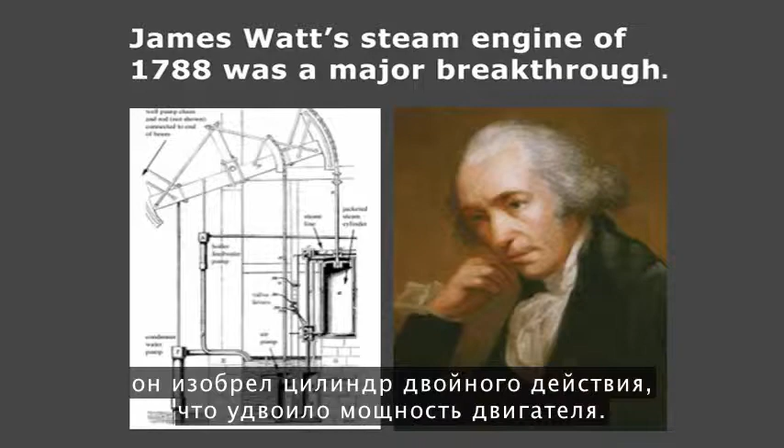And one of the great ones of all time, James Watt's steam engine of 1788 was a major, major breakthrough. James Watt didn't actually invent the steam engine, he just refined it, but his refinements were incredible. He added new linear motion guides to the pistons, he added a condenser to cool the steam outside the cylinder, he made the engine double acting so it had double the power. Those were major breakthroughs. I'm in awe of the improvements he made, and it's justifiable that our measure of power is the watt today that's named after him.

So we looked at this engine, and this had some potential. Steam engines are dangerous. They had tremendous impact on the world, as you know, Industrial Revolution and ships and locomotives, but they're usually good to be large, so they're not good for distributed power generation. They're also very high pressure, so they're dangerous.

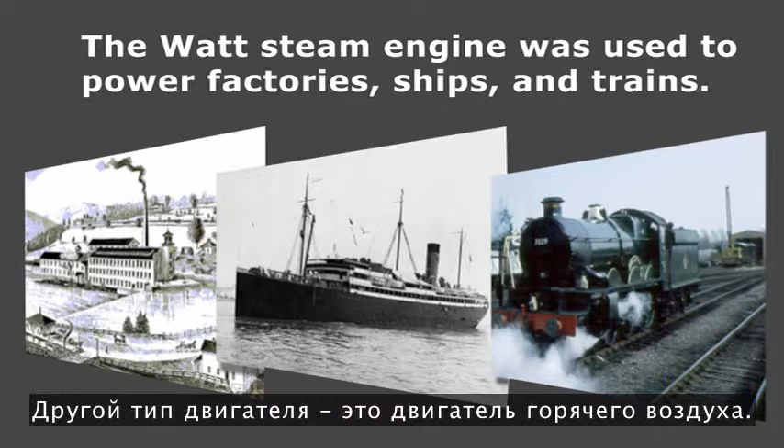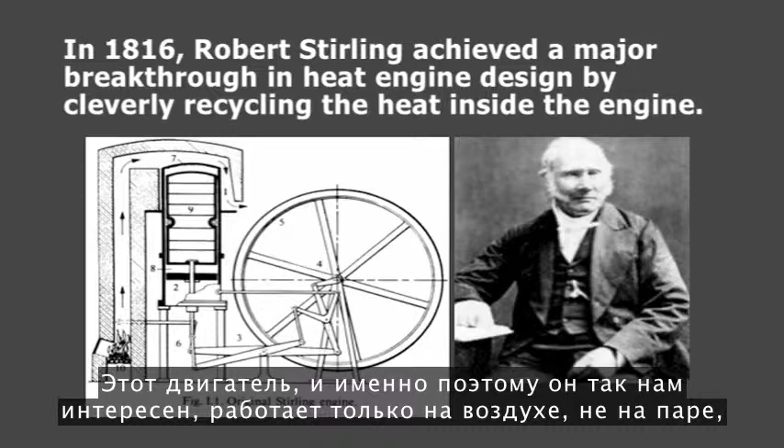Another type of engine is the hot air engine. And the hot air engine also was not invented by Robert Stirling, but Robert Stirling came along in 1816 and radically improved it. This engine, because it was so interesting, because it only worked on air, no steam, has led to hundreds of creative designs over the years that use the Stirling engine principle.

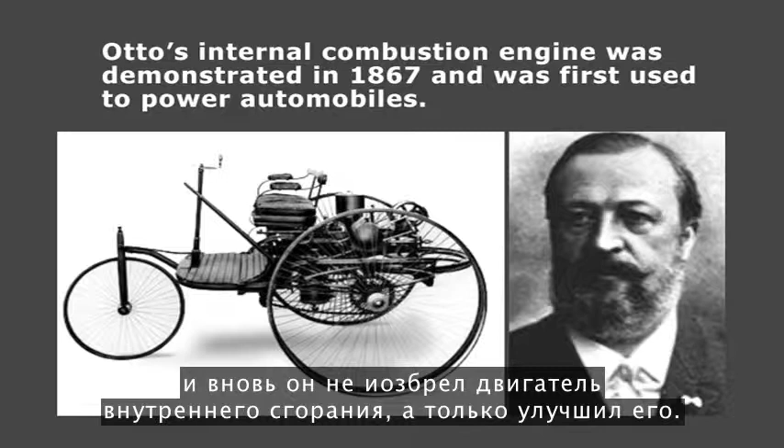But after the Stirling engine, Otto came along, and also he didn't invent the internal combustion engine, he just refined it. He showed it in Paris in 1867, and it was a major achievement because it brought the power density of the engine way up. You could now get a lot more power in a lot smaller space, and that allowed the engine to be used for mobile applications. So once you have mobility, now you're making a lot of engines because you've got lots of units as opposed to steamships or big factories where you're not making as many units.

So this was the engine that ended up benefiting from mass production, where all the other engines didn't benefit. So because it went into mass production, costs were reduced, 100 years of refinement, emissions were reduced, tremendous production volume. There have been hundreds of millions of internal combustion engines built compared to thousands of Stirling engines built, and not nearly as many small steam engines being built anymore, only large ones for big operations.

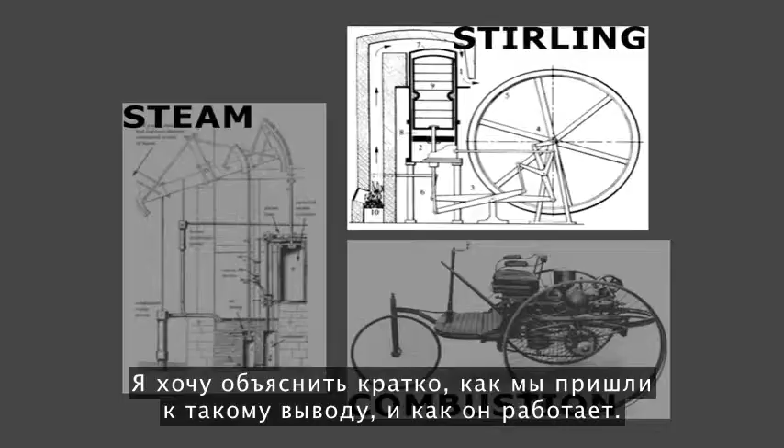So after looking at these 3 and 47 others, we concluded that the Stirling engine would be the best one to use. I want to give you a very brief explanation of how we looked at it and how it works. So we tried to look at the Stirling engine in a new way because it was practical. Weight no longer mattered for our application. The internal combustion engine took off because weight mattered because you were moving around. But if you're trying to generate solar energy in a static place, the weight doesn't matter so much.

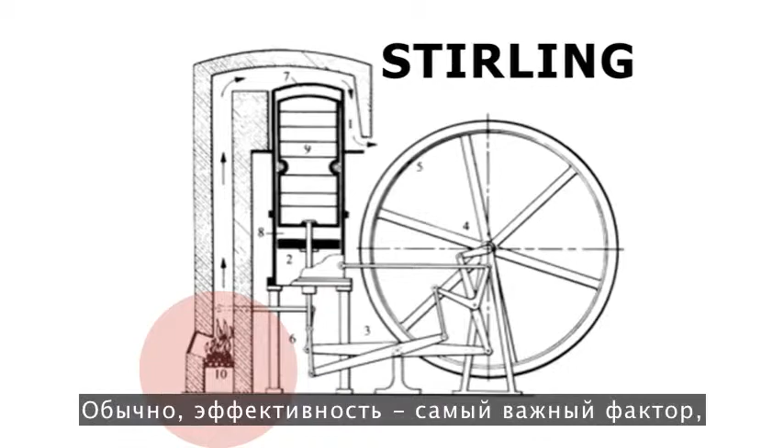The other thing we discovered was that efficiency doesn't matter so much if your energy source is free. Normally, efficiency is crucial because the fuel cost of your engine over its life dwarfs the cost of the engine. But if your fuel source is free, then the only thing that matters is the upfront capital cost of the engine. So you don't want to optimize for efficiency, you want to optimize for power per dollar. So using that new twist with the new criteria, we thought we could re-look at the Stirling engine and also bring genetic algorithms in.

Basically, Robert Stirling didn't have Gordon Moore before him to get us 3 gigahertz of processor power. So we took the same genetic algorithm that we used earlier to make that concentrator, which didn't work out for us, to optimize the Stirling engine and make its design sizes and all of its dimensions the exact optimum to get the most power per dollar, irrespective of weight, irrespective of size, just to get the most conversion of solar energy because the sun is free. And that's the process we took.

Let me show you how the engine works. The simplest heat engine or hot air engine of all time would just be this. Take a box, a steel canister, with a piston. Put a flame under it, the piston moves up. Take it off the flame and pour water on it or let it cool down, the piston moves down. That's a heat engine. That's basically the most fundamental heat engine you could possibly have.

The problem is the efficiency is 1/100th of 1% because you're heating all the metal of the chamber and then cooling all the metal of the chamber each time. And you're only getting power from the air that's heating at the same time, but you're wasting all the energy heating the metal and cooling the metal.

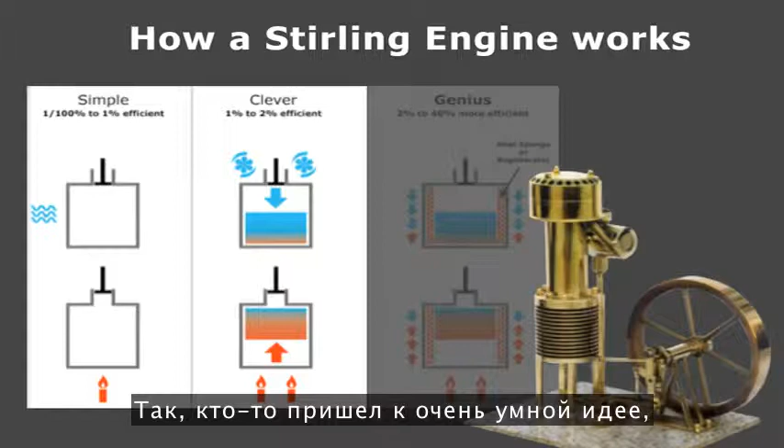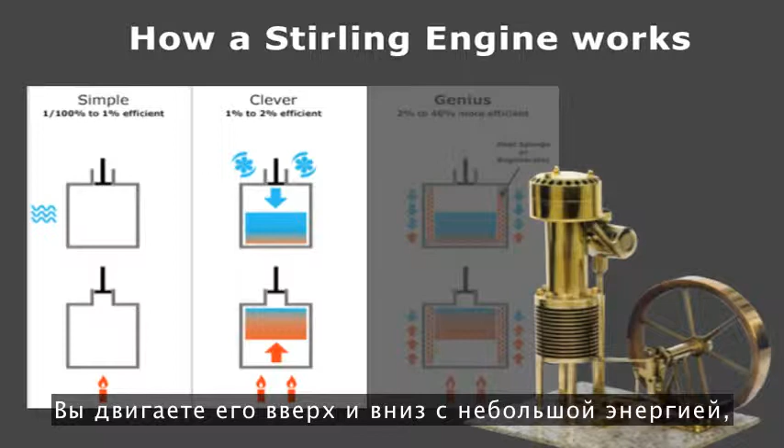So someone came up with a very clever idea to, instead of heating the whole cylinder and cooling the whole cylinder, what about if you put a displacer inside, a little thing that shuttles the air back and forth? You move that up and down with a little bit of energy, but now you're only shifting the air down to the hot end and up to the cold end, down to the hot end and up to the cold end. So now you're not alternately heating and cooling the metal, you're just alternately heating and cooling the air. That allows you to get the efficiency up from 1/100th of a percent to about 2%.

And then Robert Stirling came along with this genius idea, which was, well, I'm still not heating the metal now with this kind of engine, but I'm still reheating all the air. I'm still heating the air every time and cooling the air every time. What about if I put a thermal sponge in the middle, in the passageway between where the air has to move between hot and cold? So he made fine wires and cracked glass and all different kinds of materials to be a heat sponge.

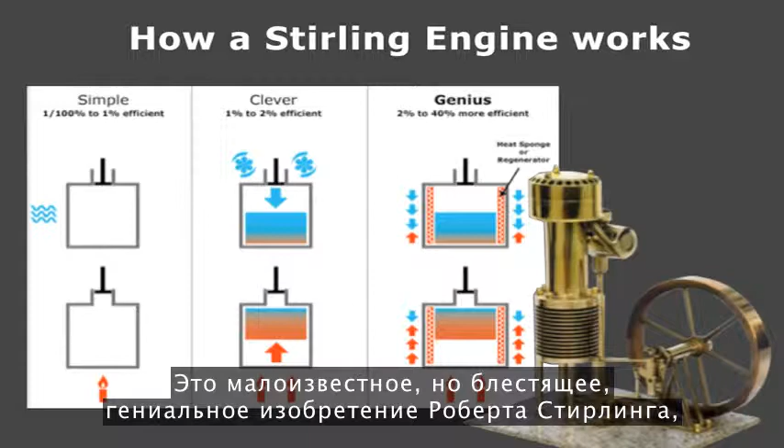So when the air pushes up to go from the hot end to the cold end, it puts some heat into the sponge. And then when the air comes back after it's been cooled, it picks up that heat again. So you're reusing your energy 5 or 6 times. And that brings the efficiency up to between 30 and 40%. It's a little known but brilliant genius invention of Robert Stirling that takes the hot air engine from being somewhat impractical, like I found out when I made the real simple version in high school, to very potentially possible once you get the efficiency up, if you can design this to be low enough cost.

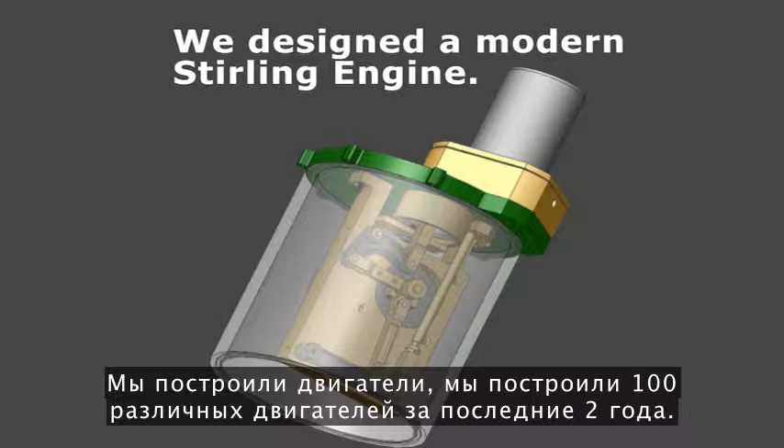So we really set out on a path to try and make the lowest cost possible. We built a huge mathematical model of how a Stirling engine works. We applied the genetic algorithm. We got the results from that for the optimal engine. We built engines. So we built 100 different engines over the last 2 years. We measured each one. We readjusted the model to what we measured, and then that led to the current prototype. It led to a very compact, inexpensive engine. And this is what the engine looks like. Let me show you what it looks like in real life.

So this is the engine. It's just a small cylinder down here which holds the generator inside and all the linkage. And it's the hot cap, the hot cylinder on the top. This part gets hot, this part is cooled, and electricity comes out. The exact converse is also true. If you put electricity in, this will get hot and this will get cold, you get refrigeration. So it's a completely reversible cycle, a very efficient cycle, and quite a simple thing to make.

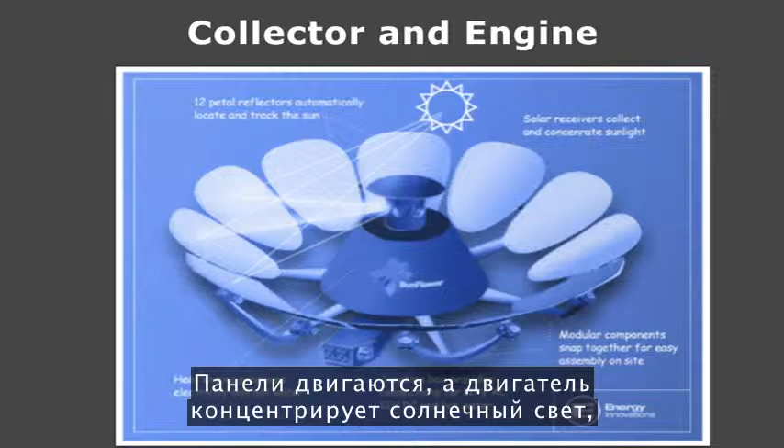So now you put the two things together. So you have the engine. Now what if you combine the petals and the engine in the center? The petals track, and the engine gets the concentrated sunlight, takes that heat, and turns it into electricity. This is what the first prototype of our system looked like, together with the petals and the engine in the center. This is being run out in the sun. And now I want to show you what the actual thing looks like.

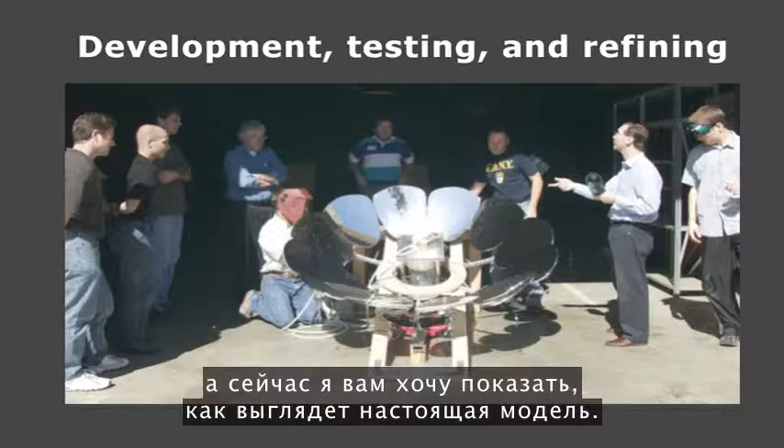Thank you. So this is a unit with the 12 petals. These petals cost about $1 each. They're lightweight injection molded plastic, aluminized. The mechanism to control each petal is below there, with a microprocessor on each one. There are thermocouples on the engine, little sensors that detect the heat when the sunlight strikes them. So each petal adjusts itself separately to keep the highest temperature on that.

When the sun comes out in the morning, the petals will seek the sun, find it by searching for the highest temperature. About 1.5 minutes or 2 minutes after the rays are striking the hot cap, the engine will be warm enough to start, and then the engine will generate electricity for about 6.5 hours a day, 6.5 to 7 hours as the sun moves across the sky.

A critical part that we can take advantage of when we have these inexpensive microprocessors is each one of these petals is autonomous, and each one of these petals figures out where the sun is with no user setup. So you don't have to tell what latitude, longitude you're at. You don't have to tell what your roof slope angle is. You don't have to tell what orientation.

It doesn't really care. What it does is it searches to find the hottest spot. It searches again a half an hour later. It searches again a day later. It searches again a month later. It basically figures out where on Earth you are by watching the direction the sun moves. So you don't have to actually enter anything about that.

The way the unit works is when the sun comes out, the engine will start and you get power out here. We have AC and DC, get 12 volts DC, so that could be used for certain applications. We have an inverter in there, so you get 117 volts AC. And you also get hot water.

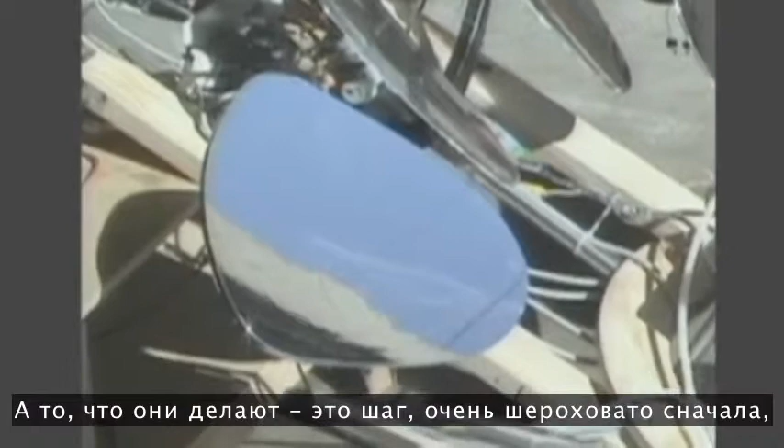So this is a first test where we took it outside and each of the petals were individually seeking, and what they do is step very coarsely at first and then very finely afterwards. Once they get a temperature reading on the thermocouple indicating they found the sun, then they slow down and do a fine search, and then all the petals will move into position and then the engine will start.

So we've been working on this for the last 2 years. We're very excited about the progress. We do have a very long way to go, though, still. And let me tell you a little bit more about that. This is how we envision it would be in a residential installation. You'd probably have more than one unit on your roof. It could be on your roof or in your backyard or somewhere else.

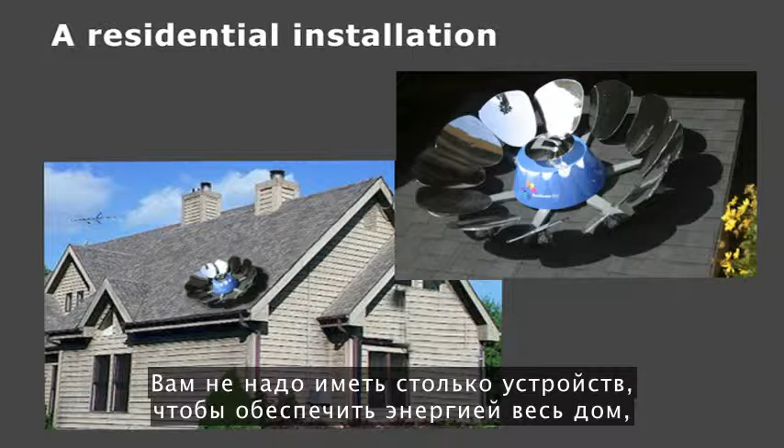You don't have to have enough units to power your entire house. You just save money with each incremental one you add. So you're still using the grid, potentially, in this type of application to be your backup supply. Of course, you can't use these at night, and you can't use these on cloudy days.

But by reducing your energy use pretty much at the peak times, usually when you have your air conditioning on or other times like that, this generates the peak power at the peak usage time. So it's very complementary in that sense. This is how we would envision a residential application.

We also think there's very big potential for energy farms, especially in remote land where there happens to be a lot of sun. It's a really good combination of those two factors. It turns out there's a lot of powerful sun all around the world, obviously, but in special places where it happens to be relatively inexpensive to place these, and also in many more places where there is high solar power. So an example of that is, here's the map of the United States.

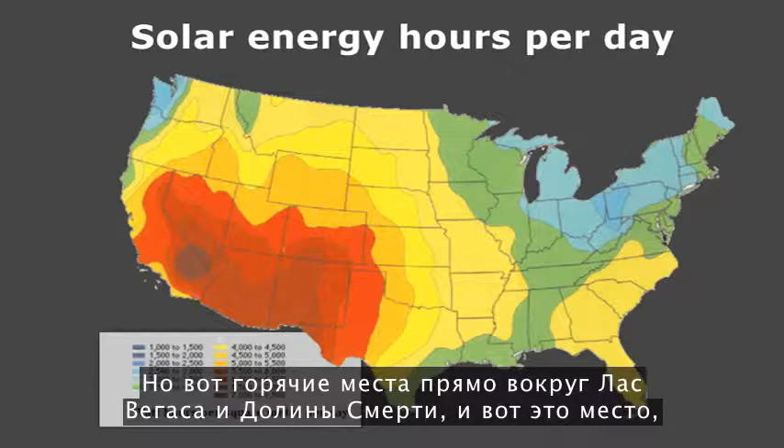Pretty much everywhere that's not green or blue is a really ideal place, but even the green or blue areas are good, just not as good as the places that are red, orange, and yellow. But the hot spot right around Las Vegas and Death Valley in that area is very, very good. And all this does is affect the payback period. It doesn't mean that you couldn't use solar energy. You could use solar energy anywhere on Earth. It just affects the payback period if you're comparing to grid-supplied electricity.

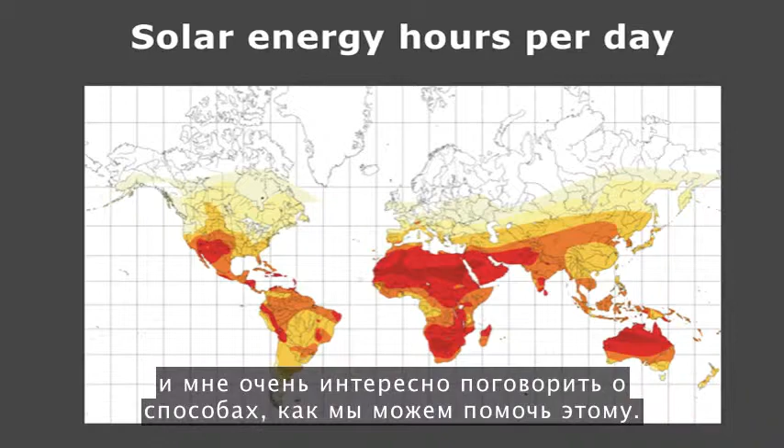And again, you can see a huge swath of the middle of pretty much where a large part of the population is. There's tremendous chances for solar energy. And of course, look at Africa. It's just unbelievable what the potential is to take advantage of solar energy there. And I'm really excited to talk more about finding ways we can help with that.

So in conclusion, I would say, my journey has shown me that you can revisit old ideas in a new light. And sometimes ideas that have been discarded in the past can be practical now if you apply some new technology or a new twist. We believe we're getting very close to something practical and affordable.

Our short-term goal for this is to be half the price of solar cells, and our longer-term goal is to be less than a 5-year payback. And at less than a 5-year payback, all of a sudden this becomes very economic. So you don't have to just want to have a feel-good attitude about energy to want to have one of these. It just makes economic sense.

Right now, solar paybacks are between 30 and 50 years. If we get it down below 5 years, then it just becomes almost a no-brainer, because someone else will finance it for you, and you can just make money basically from day one. So that's a real powerful goal that we're really shooting for at the company.

Two other things that I learned that were very surprising to me. One was how casual we are about energy. I was walking from the elevator over here, and even just looking at the stage right now. So there's probably 20 500-watt lights right now. There's 10,000 watts of light pouring on the stage.

1 horsepower is 746 watts at full power. So there's basically 15 horses running at full speed just to keep the stage lit. Not to mention the 200 horses that are probably running right now to keep the air conditioning going. And it's just amazing. Just walk in the elevator, and there's lights on in the elevator. Of course, now I'm very sensitive at home when we leave the lights on by mistake.

But everywhere around us, we have insatiable use for energy because it's so cheap. And it's cheap because we've been subsidized by energy that's been concentrated by the sun. Basically, oil is solar energy concentrate. It's been pounded for 1 billion years with a lot of energy to make it have all that energy contained in it. And we don't have a birthright to just use that up as fast as we are, I think.